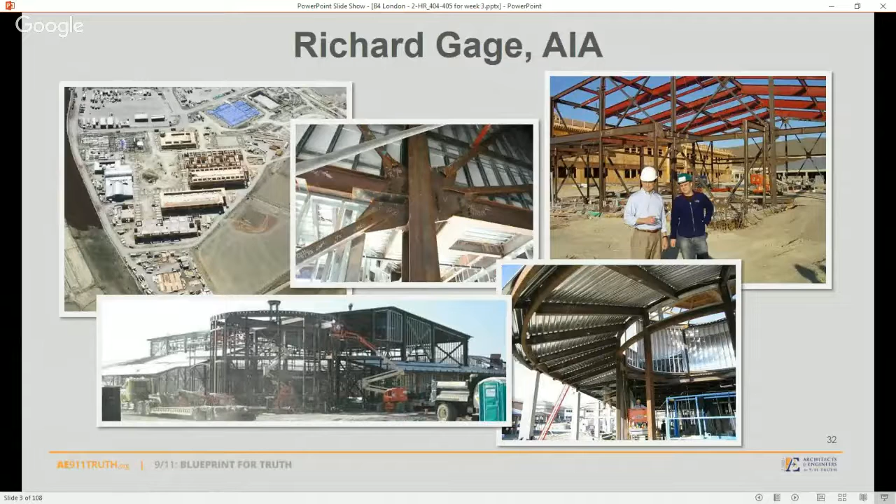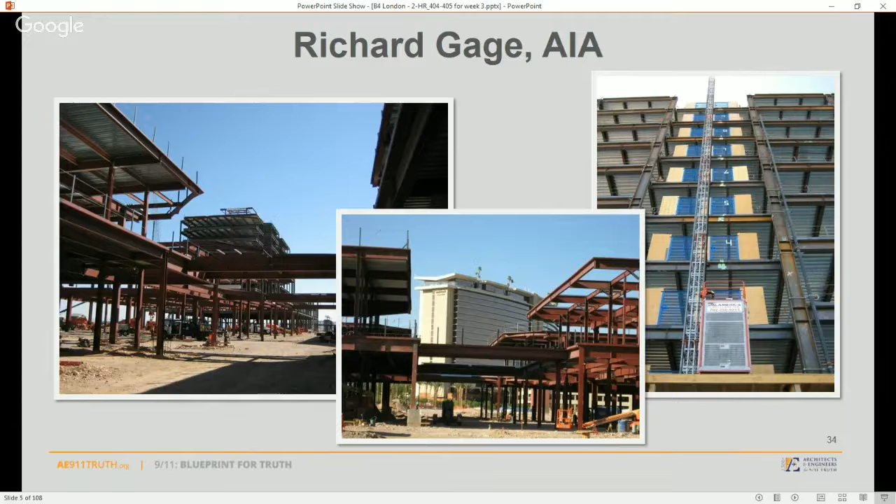So a little bit about me. I've been an architect for 28 years. I've worked on many different types of buildings, including these $3 and $10 million gymnasiums in the San Francisco Bay Area, with the construction documents and the construction administration for this $125 million high school in the Bay Area. And also more recently, the construction documents and administration for this $400 million project near Las Vegas, Nevada. This is a project with mid-rise office space, commercial space, altogether more than 1,200 tons of fireproofed steel framing.

I'm joined in this effort by 2,700 architects and engineers who have put their reputations on the line, having looked at the evidence, which you're going to be seeing today, having come to the conclusion that we've not been told the whole story, and what we have been told is not the truth. And that's why we have thousands of highly qualified technical and building professionals demanding a new investigation. And I'm honored to be counted among them. We founded this organization 10 years ago.

We've been educating architects and engineers all over the country, the public, the media, and elected officials as well in Washington, D.C., where we've given our DVD and our petition to the offices of 535 congressional elected officials. We've met with their staffers. Several dozen of them have had the opportunity to have a glimpse of the evidence you're going to be seeing today in a 15-minute presentation, which we have called Solving the Mystery of World Trade Center 7, narrated by Ed Asner. We've also been throughout the United States in the last year showing our film, Firefighters, Architects, Engineers Expose 9/11 Myths.

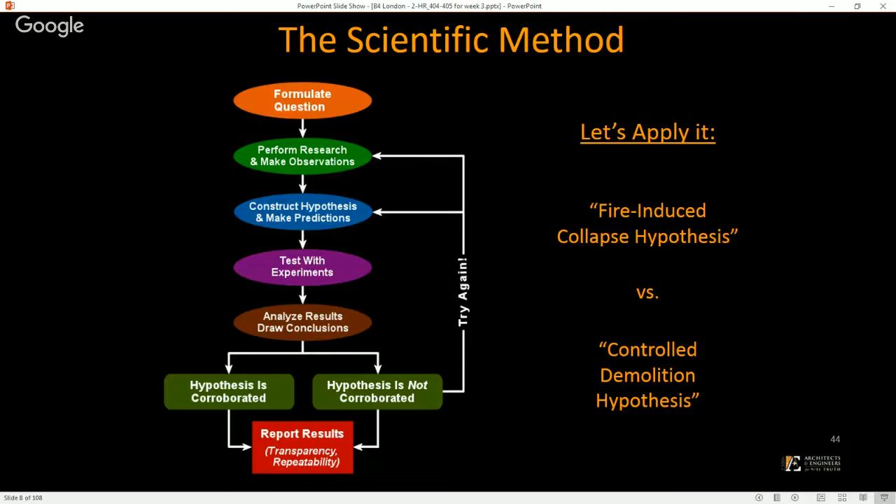And we're going after the truth, and they expect to find it, and we're expecting that to be a major player in the awakening of professionals across the country. But we're going to use the scientific method right now. We're not going to wait till that comes out next year. We're going to gather data. What are the forces that destroyed buildings? Well, we reviewed explosions. We reviewed earthquakes last week. We're going to look at fires a little more today.

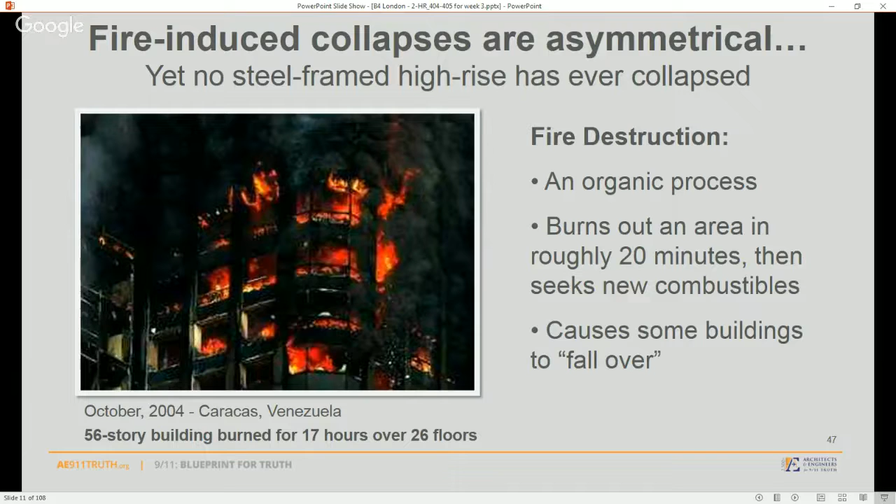Fires never brought down a high rise, ever, except on 9/11 when we've had 3. Fires are an organic process. They burn through a building every 20 minutes or so in a given area, move on looking for fresh new fuel sources. So if a building, say a wood frame building, which certainly have come down, was to collapse due to fire, we'd expect a gradual collapse. It would fall over, not straight down through the path of intact, cold, hard structure below. But let's take a deeper look at steel frame buildings in fires.

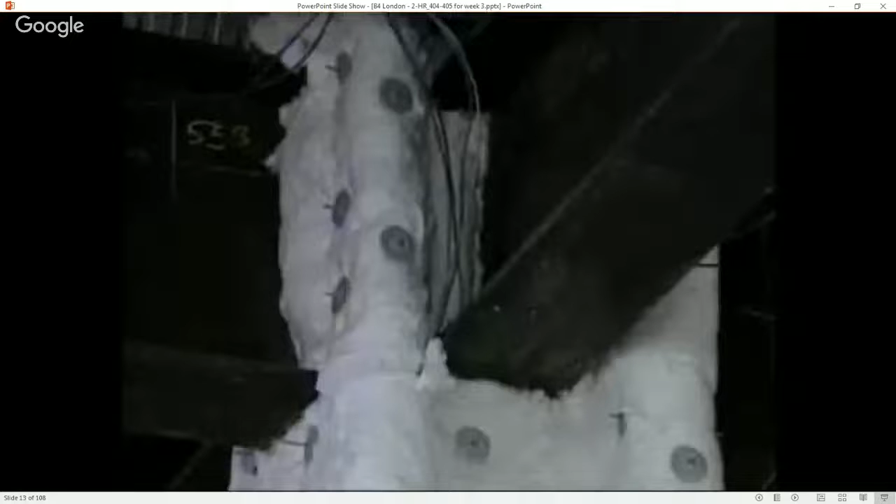The way in which steel-framed buildings behave in fires depends on their construction. In this test, done by British Steel in 1995, a large amount of typical office furniture was burned to see what would happen to the heavy steel beams that supported the ceiling. When steel is bare, when it heats up, it gets weaker. It's not that it melts in a fire. In fact, normal fires are not hot enough to melt steel. Even if you were, for example, to use an unusual fuel like kerosene, you cannot achieve temperatures hot enough to melt steel. But what happens is it starts to lose its strength.

And as it loses its strength, it starts to sag. It becomes softer and sags and can no longer support the load. This was the largest test of its kind ever conducted. It showed how unprotected steel can be distorted even by a normal office fire. But as is typical in steel buildings, the structural beams only slowly and progressively warped and sagged. There was no chance of a sudden collapse. In over 20 years, I have not seen, until recently, a protected steel structure that has collapsed in a fire. Until recently, of course, we're referring here to 9/11, where we did have 3 collapse.

Now, what did you just see? You just saw a historic fire test in the United Kingdom in 1995 in Cardington, where they burned an 8-story building with 2,000-degree fires, which are completely unheard of. Even on 9/11, we didn't have fires anywhere close to those temperatures. And yet this building and these beams and columns, unprotected, no fireproofing on many of them. Some of them had fireproofing. They were testing both conditions. It did not fail. They merely softened a little bit and sagged, because steel can lose half of its strength at 1,200 degrees Fahrenheit.

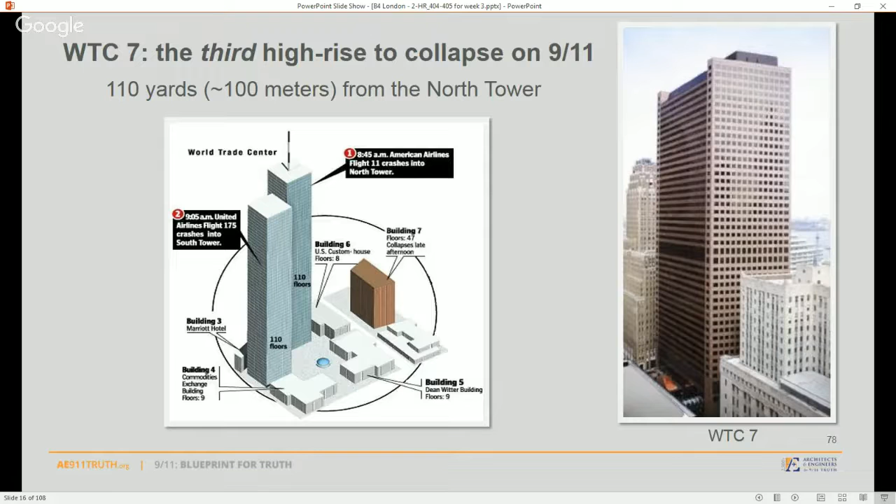So the Twin Towers went down earlier that day in the morning. 7 hours later, Building 7 collapses. Here it is, surviving nicely after the Twin Towers went down, or during that time. And there was some minor damage to the building. NIST claims that this is not a significant factor in this building's collapse.

In fact, they focus on a structural failure on the opposite side of the building. They rule out damage from the Twin Towers. They rule out diesel fuel, which was in this building, but they say there's no evidence that it was burning. They rule out the ground shaking from vibrations from the collapse of the Twin Towers. We'll look in detail this week about what their theory is and how much sense it makes.

But first, we're going to note that there are typical features of controlled demolition. And we looked at those last week in detail. And I encourage you to go back and look at the archive and pick up the basics, which we're not going to be able to cover today because we're going into more depth. Right on the website, AE911Truth.org, we have the archives of our previous webinars.

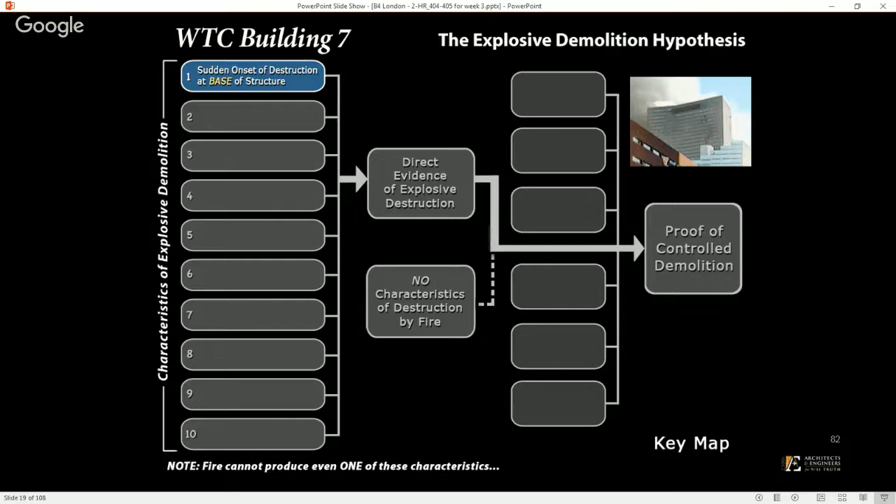So let's start with seeing if there is a sudden onset of destruction at the base of this structure. We look for the first time, for many of you, at a glance at the destruction of this building, narrated in this case by Dan Rather that morning on CBS. And what you're seeing are high shots.

Now, here we're going to show you a videotape of the collapse itself. Describe that. Now we go to videotape the collapse of this building. It's amazing. Amazing, incredible, pick your word. For the third time today, it's reminiscent of those pictures we've all seen too much on television before, when a building was deliberately destroyed by well-placed dynamite to knock it down.

Well, that's an interesting comment. Of course, we've never heard that comment from Dan Rather again after that morning, which was his intuition about what he was looking at. Indeed, it looks exactly like the old hotels in Las Vegas. And that's the first intuition of all the architects that come by our booth, who see it for the first time, or maybe not for the first time. They all, 90% of them, say that's a controlled demolition, or that looks like a controlled demolition.

Well, we haven't seen this building destruction played on national television, with the exception of maybe 4 times in the last 10 years. Why? This is easily one of the worst structural failures in modern history. After the Twin Towers, it is the worst. Should have been the most studied building failure in history, because many high-rises are built just like this, hundreds, with long span steel beams, which we'll come back to.

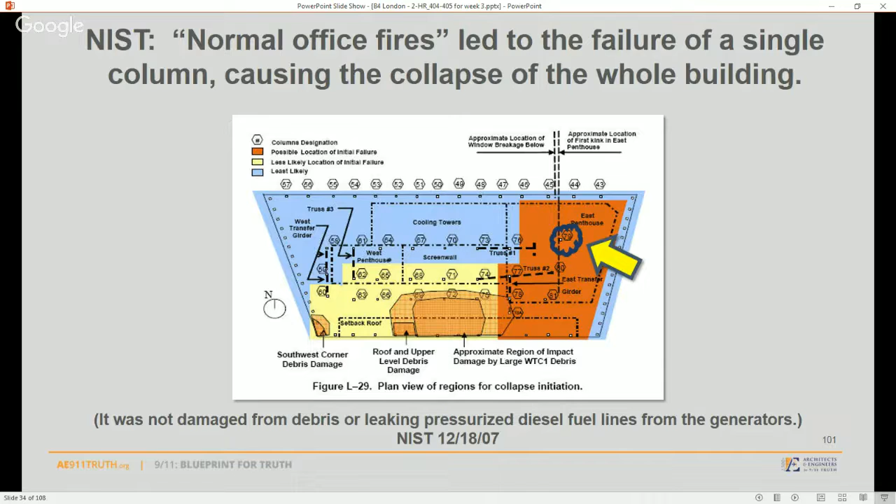But what's the problem? These fires are burned out over an hour before on the 12th floor, where NIST focuses its initiation of collapse with raging fires. The photos prove that the fires were out up there. They had moved across and were heading in this direction to the west.

So here's NIST's fire. It starts over here on the right side, gets larger, moves across to column 79 at, they're saying, 4 p.m. But again, those fires are out. We just saw that. They burned out over an hour before. And yet they claim that they're sitting there for over an hour burning around column 79. Well, there's not enough fuel to burn that long.

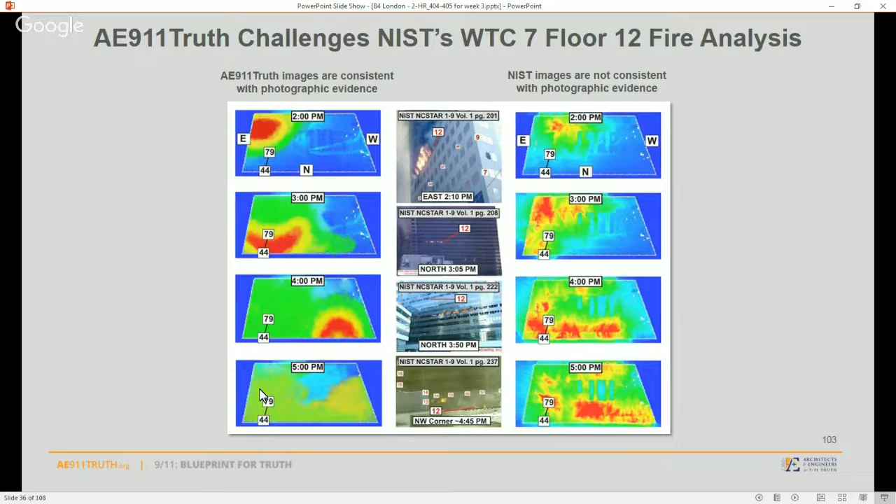What the photos show is that these fires moved from 79 at 2 or 3 over to the west side, leaving column 79, according to the photos, not anywhere near the heat. Why is this important? Because there's a theory that NIST puts forth. And that theory tells us that those fires expanded these long span beams, thermal expansion, which pushes this girder off of its seat on this column 79,

allowing floor 13 to fall on 12, causing a pancake collapse for 10 floors, leaving this column 79 unbraced, where it finally buckles, which is a bending process in columns, allowing the complete collapse then all the way up to the east penthouse, causing the east penthouse to fall. I'm going to point out a series of failures, impossibilities in this theory. First of all,

this composite floor structure is composed of concrete and steel. And it's all fireproofed. So these steel beams could not have expanded because they're fireproofed. What we're looking at here is a partial fireproofing during construction, but it all ends up being fireproofed. 2 and 3 hour protection for the columns and beams. In other words, a fire could last that long and not expand these. So this is ignored by NIST.

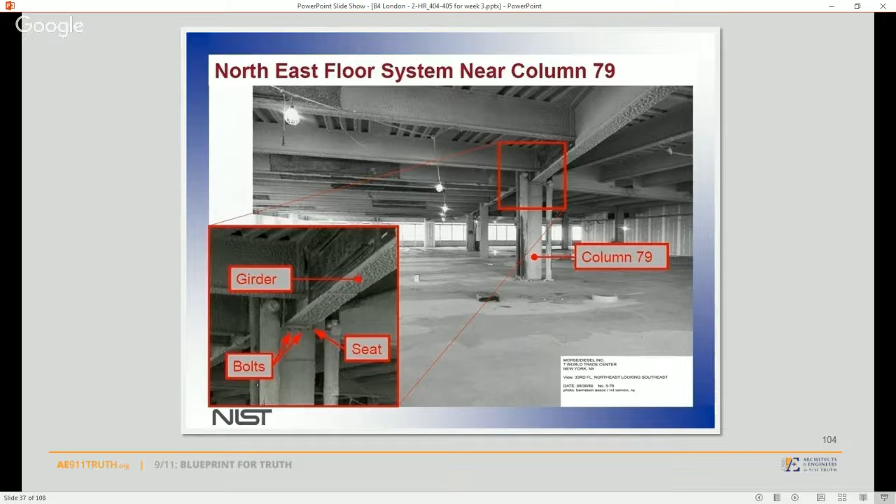But even if there was a complete pancaking collapse inside this building of 9 floors, as NIST theorized, you would have seen a massive deformation on the outside perimeter structure, because all these beams and girders frame quite securely to the perimeter structure. And you would have seen massive breaking of windows and granite panels and crumpling of this building. That didn't happen. You saw the building go down itself.

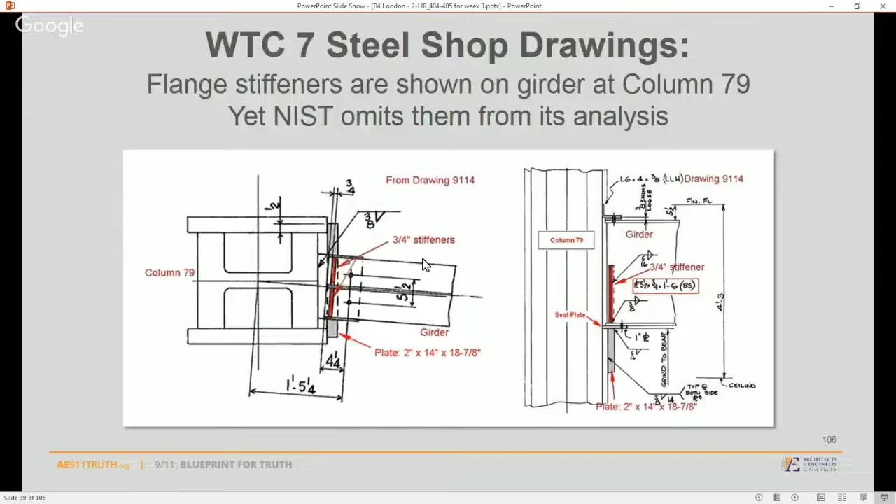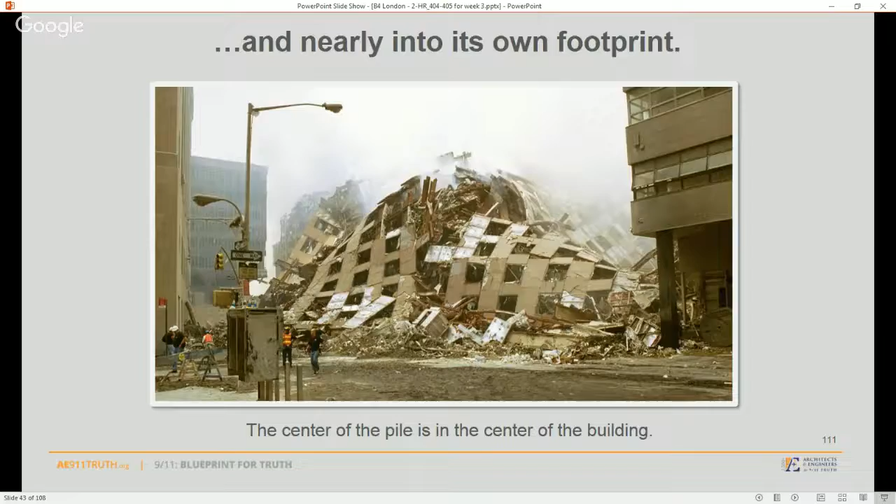How do we bring a building down like that? Well, in this building, we have 80 columns or so. All of them have to be removed at once. And as we saw evidenced by the collapse of this penthouse a half a second prior, all 24 core columns would have to be removed at once, allowing that penthouse to come down early, and then followed by the perimeter columns, all within a fraction of a second. And then that repeated on at least 8 floors. And I'll show you why I say that.

Does fire have that level of precision? Fire, an organic process that moves through a building every 20 minutes or so, burning up in one area, moving on, looking for fresh new fuel sources. No, not going to happen.

How fast is this building coming down? Well, NIST admits that it came down at free fall. Now, this was after they denied publicly for years that it came down at free fall. They say, hey, well, if it came down at free fall, that would mean there'd be no structure underneath it. Well, then members of AE911Truth, particularly David Chandler, a physics teacher, whom we'll hear from, shamed them publicly in a press conference into acknowledging that it did, in fact, come down at free fall.

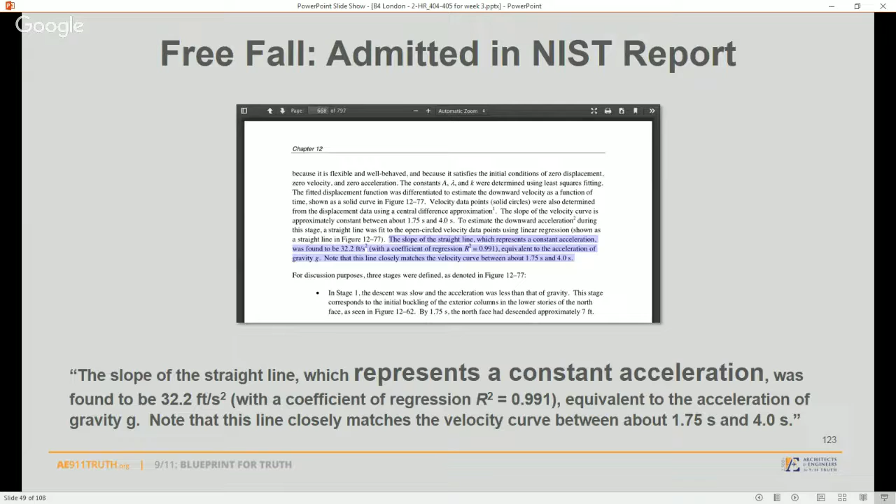You have to remove that structure all at once. And that's the evidence we see in key point number 5 here, the total dismemberment of the steel structure, where it's broken up and ready for loading and shipment. It falls like a house of cards, one structural beam removed from its column on each side, all throughout the building. Buildings that fall naturally don't break up like that. They're damaged, certainly. They do not dismember. Their concrete is not pulverized to a fine powder, which we'll be looking at in the case of Building 7.

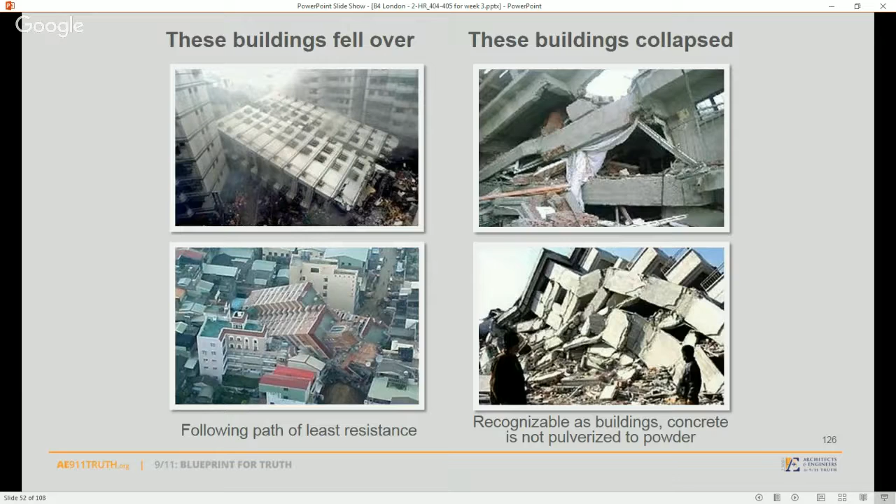Well, FEMA did an evaluation in 2002. And its author, Jonathan Barnett, fire protection engineer, says publicly, steel members in the debris pile appear to have been partly evaporated in extraordinarily high temperatures. But there's no explanation of where these extraordinarily high temperatures could possibly have come from. These are 500-degree fires, maybe 600, maybe 700 degrees. These are not 2,000-degree fires created in that test you saw with ceiling-high piles of wood designed to create the hottest fires imaginable by hydrocarbons.

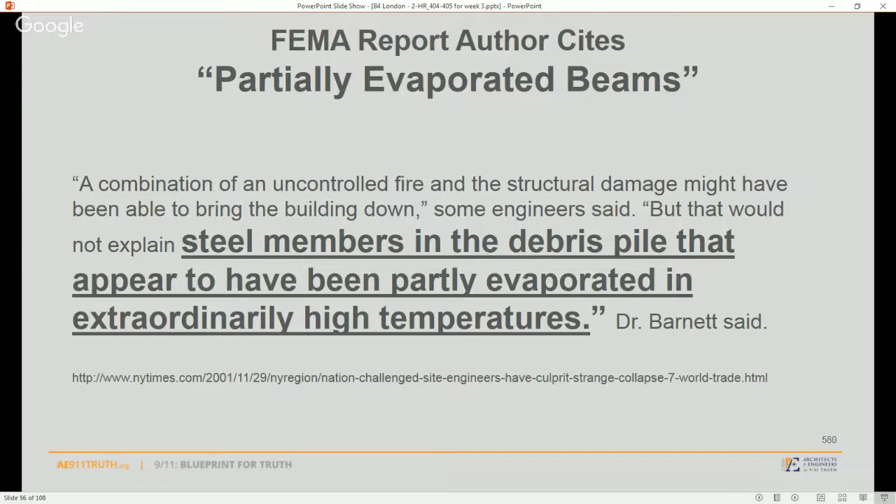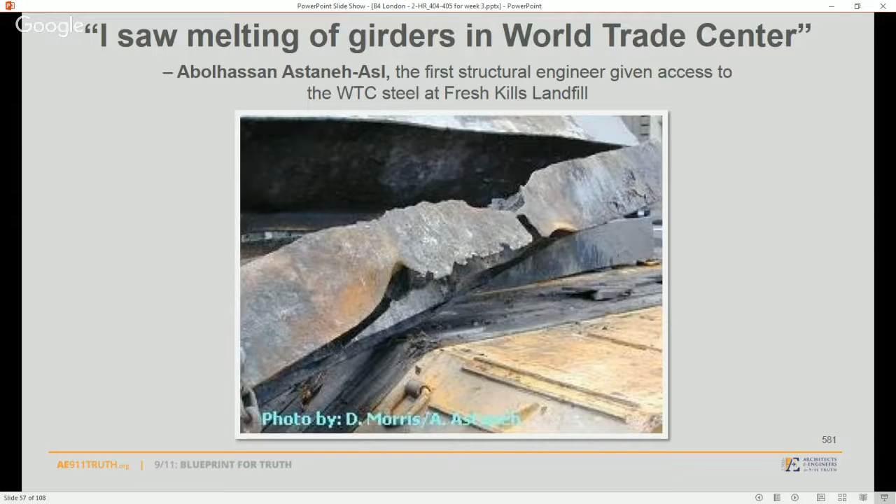No, it takes 4,000 degrees Fahrenheit to evaporate steel. And it melts at about 2,800 degrees. There's no temperatures or explanations of such in this fire. In fact, Abolhassan Astaneh-Asl, the structural engineer given unlimited access to the Fresh Kills landfill, examining, documenting the hot temperature corrosion of this steel from Building 7, was completely puzzled by how this could have happened. He doesn't posit an explanation, but FEMA does.

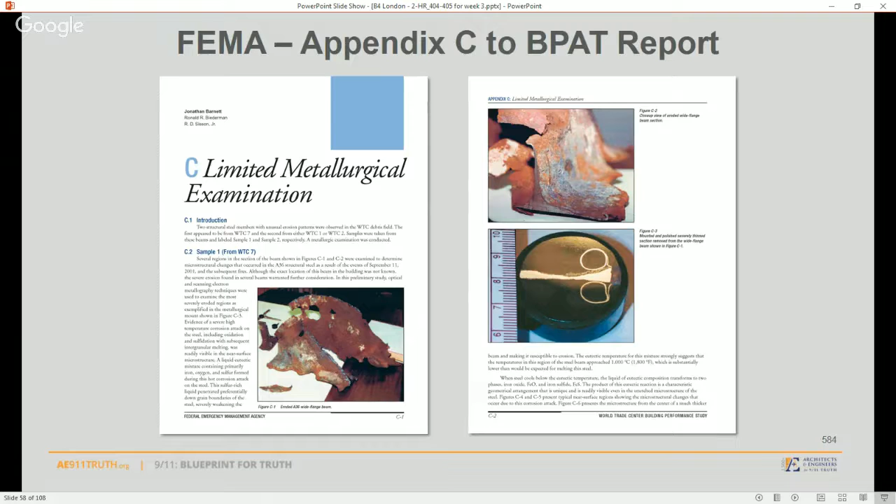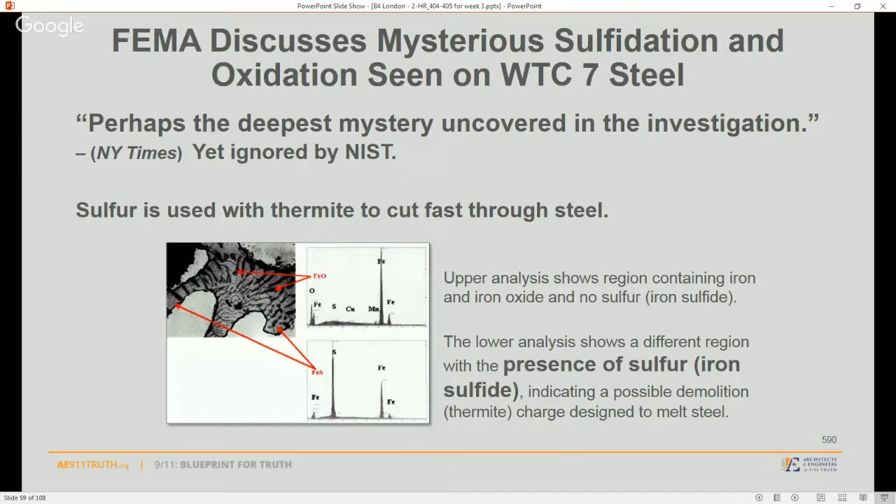In fact, they did a complete detailed metallurgical examination of this steel from Building 7 in their 2002 report. And what do they find? Well, they find what the New York Times calls the deepest mystery uncovered in the investigation. They find sulfur, the presence of sulfur, iron sulfide, molten iron mixed with sulfur. Where did that come from? Never before observed in building fires. It's called a eutectic reaction.

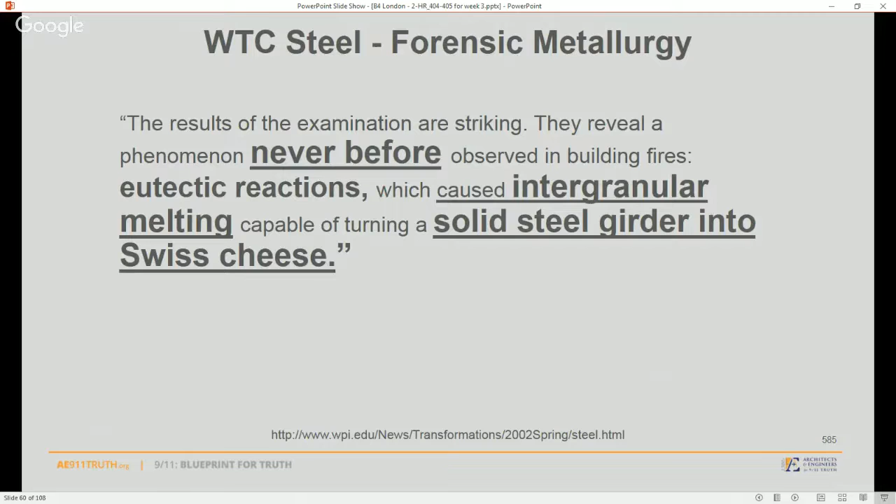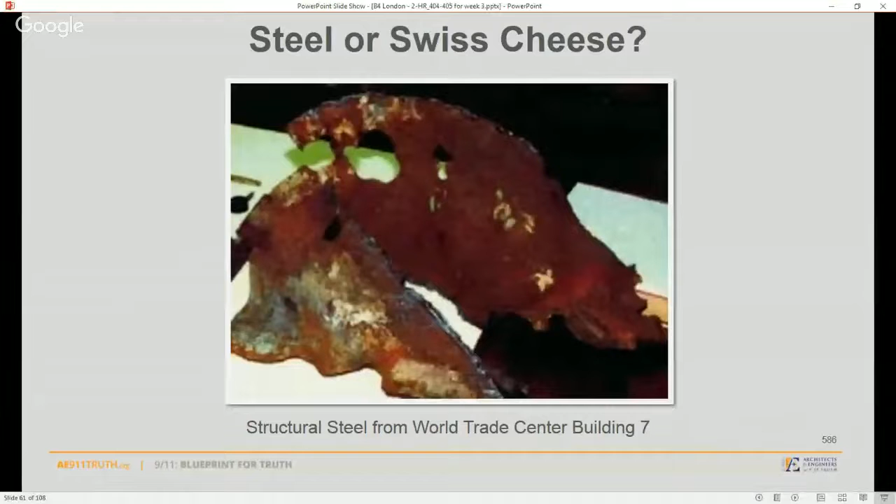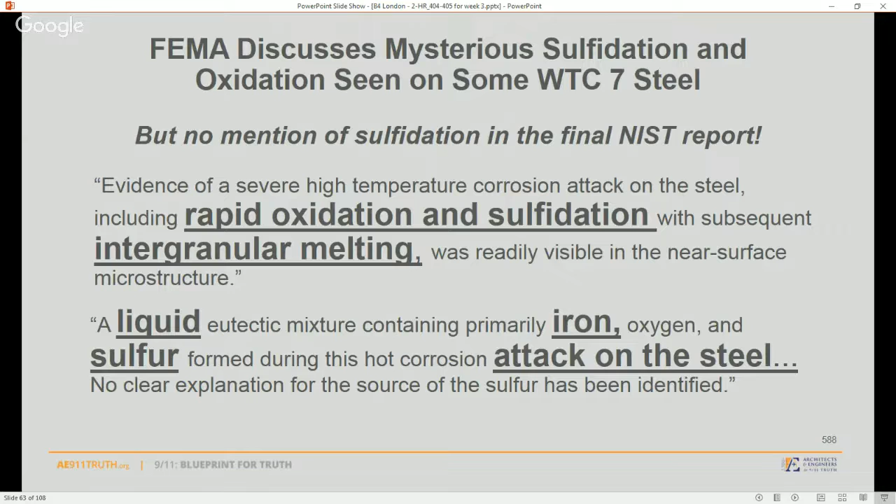Melting, capable of turning a solid steel girder into Swiss cheese, like this piece of World Trade Center 7 steel. The focus of their investigation, this doesn't happen in normal office fires, the official cause of this building's collapse. Rapid oxidation, sulfidation, intergranular melting. The steel is melting from the inside out. Liquid iron and hot sulfur attack on the steel. Where does liquid iron come from? This is not even melted steel. This is elemental iron that's documented here by this team of technical experts in the official report from FEMA, unexplained by NIST.

And there's lots more evidence. In fact, we looked last week at the pools of molten iron found, molten iron pouring out of the south tower, which we'll get to next week. Molten iron droplets found in the dust, billions of them, 10 tons altogether or so. We'll get to that in week 4.

But so far we have chemical evidence by official sources, FEMA, in their 2002 report, which NIST threw out when they took over this investigation, not including any of this detailed metallurgical examination of the steel from World Trade Center 7 in their final report when it came out in 2008. It's completely removed. Well, to the 2,700 architects and engineers that I represent and most other people who see this evidence, this is direct evidence of explosive destruction. Fire can't create any one of these, let alone all of them.

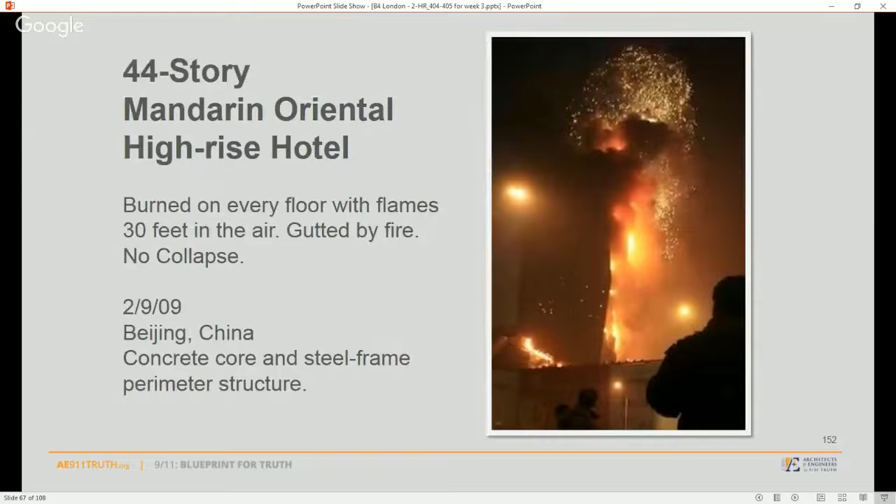We have quite a history of such fires, much larger, longer lasting in these buildings, like this one in China in 2009, burning top to bottom. And in the last couple of years, there's been a number of fires in the Middle East in skyscrapers that have not brought any of those down, even though they're like this one, burning top to bottom in a complete conflagration.

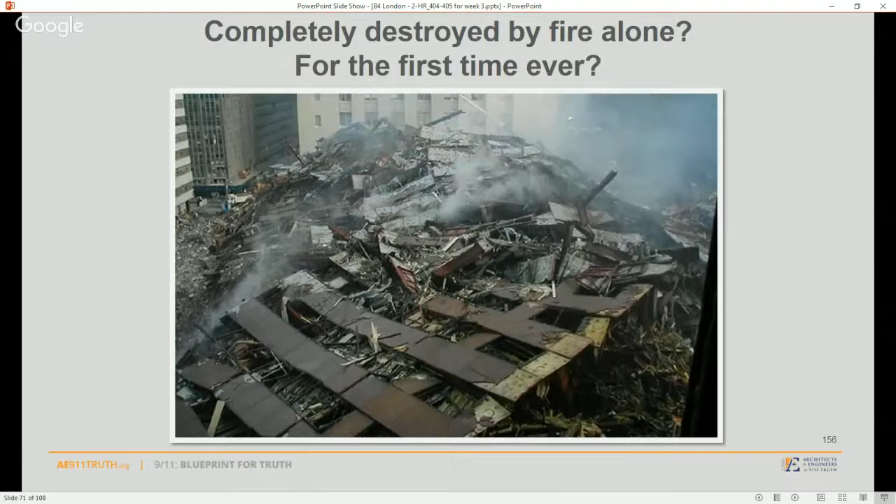Now, the data from the NIST reports, let's take a look at it. There were investigations by our government into this collapse, starting with volunteers in 2001. Well, these volunteers worked themselves into the FEMA report, finally got some funding, $600,000. And you saw the metallurgical examination that came out of that report, which was removed by NIST when they came out with their final report 7 years later, claiming normal office fires brought this building down.

But look at this cast of characters, the main ones working all the way through from the FEMA report, from the volunteers. Gene Corley was an original volunteer, through all of the other reports, helping Popular Mechanics as well create their targeted effort to discredit those trying to bring truth and awareness to the American people, professionals, the media, the government about this. But they don't look at any of the evidence that we've been looking at this week and last week. They simply say, oh, they're conspiracy theorists. There's no architects and engineers.

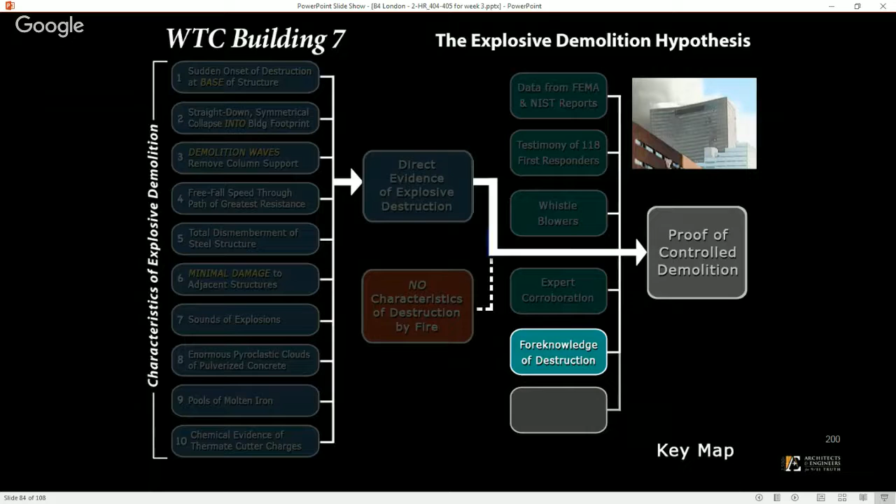Is there foreknowledge of the destruction of this building? We looked at some last week. Let's look at some more. The department fire chief, Nick Visconti, says, hey, we're removing the command post in Building 7 over this way. That building's coming down. Now, the fire chiefs told the firefighters not to go in and fight these fires. They were told it was going to come down. They were told it had structural damage. That was the story put out.

So they're all, you know, no building has ever come down due to fire. No high-rise structure. Okay. Well, in fairness, you know, they did lose that morning hundreds of firefighters in a building that had structural damage. So, okay, we're not going to argue this point. We might make the same decision to be cautious.

But interestingly enough, in this interview with Indira Singh, she says, yeah, they told us Building 7 was going to come down or was being brought down. There were all these rumors about them bringing down Building 7. Some of those rumors were associated with the structural damage. Do they actually use the words? The interviewer, Bonnie Faulkner, says, and who was it was telling this? They said, well, there was the fire chief, and he said they were going to bring it down.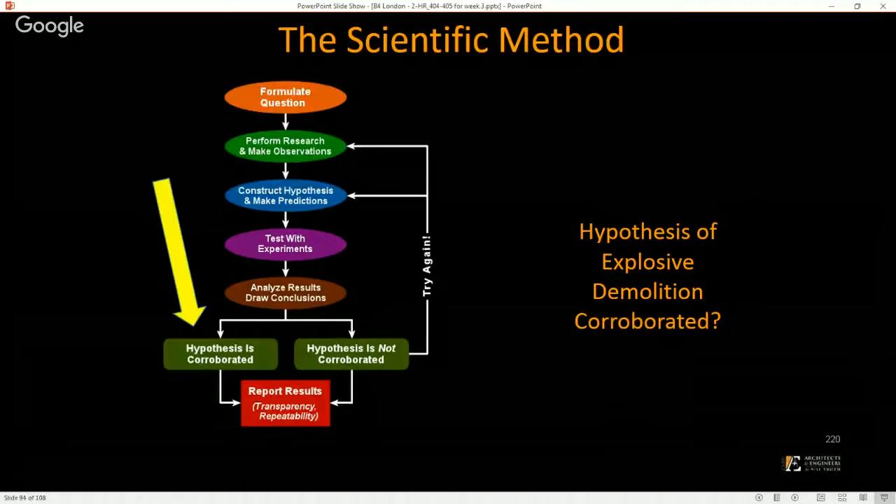Well, there's plenty of other witnesses that we heard last week about explosions prior to the collapse of this building. So I encourage you to look at that information. At this point, though, is the hypothesis of controlled demolition corroborated for you with the evidence that we've seen this week? Do we have at least eight today of the key characteristics, and last week, characteristic features of direct evidence of explosive destruction? Can fire create any one of these? Can fire create all of them?

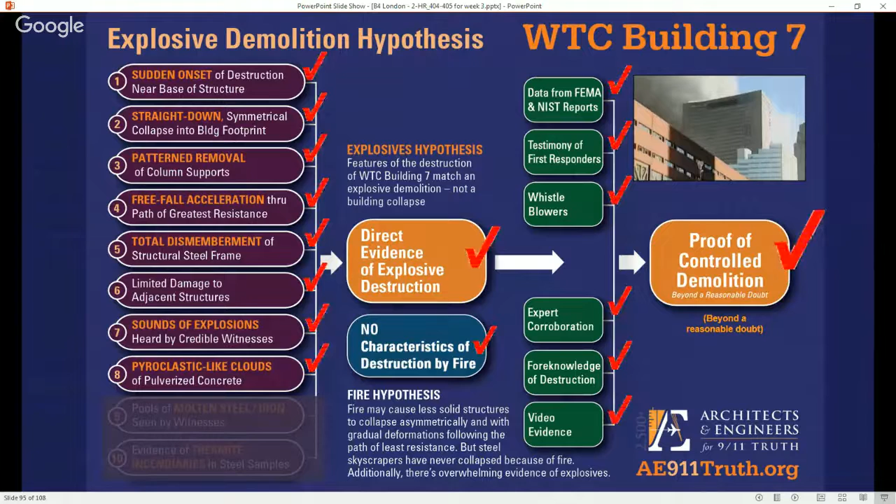Well, with additional corroborative testimony and data, video evidence, is this to you proof of controlled demolition? Is it proof beyond a reasonable doubt? That's the question. Do we need a new investigation?

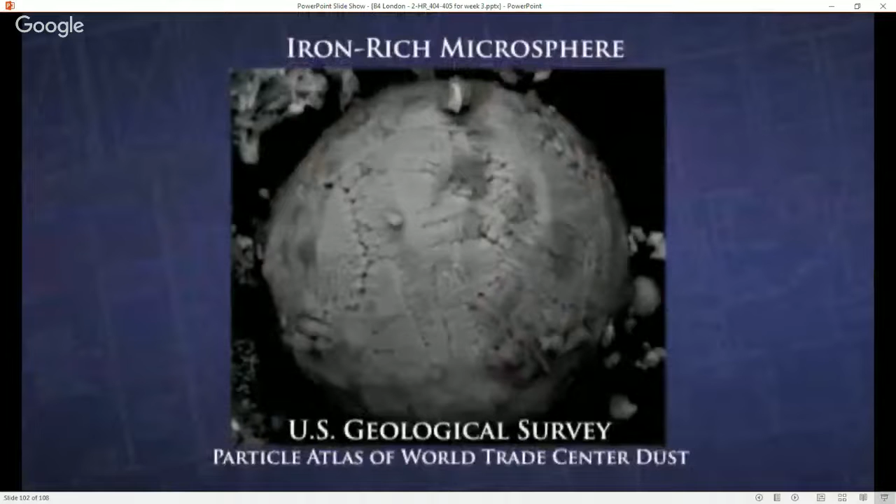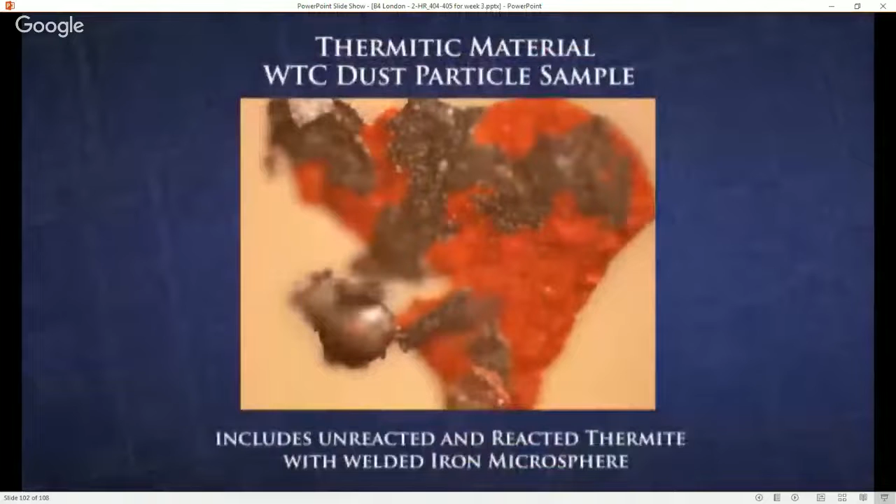Zeker weten. What I saw, it was a classic implosion. The center of the core, the penthouse area, starts to move first, and then the building follows along with it. NIST excluded the documents from FEMA in Appendix C that documented the evidence of melting steel. In an office fire, you cannot generate enough heat to melt steel. There were these iron microspheres present in all of the dust samples. They needed to have been formed in extremely high temperatures. All the characteristics of the microspheres, along with what I see in the attack of the beams that were actually found, tell me that thermite was involved. In the dust, what we had found was a modern version of thermite, which we call nanothermite. NIST concedes that they found no evidence for explosives. So then we asked them, well, did you look? And they said, no, we did not look for explosives or residues of explosives.

And in fact, the evidence is overwhelming that these red-gray chips are very high-temperature incendiaries. And we have watched as scientific integrity has been undermined, and scientific research politicized in an effort to advance predetermined ideological agendas. If this is a crime, I think everybody agrees it's a crime. Evidence was removed from the scene of the crime. You can't do science when you are deprived of the evidence and when your hypothesis is the least valid instead of the most likely. And the most likely hypothesis in the case of Building 7 wasn't even mentioned. This is not science.

Imagine showing this powerful film with another hour in our free version, or another 90 minutes of solid, packed evidence, including 8 psychologists who help us understand why this information is just so difficult for so many people to digest, how it turns our worldview on its edge, upside down, like my own experience 10 years ago, hearing David Ray Griffin on the radio, not having been aware of the third tower at all before that, or that there was any alternative theory about how these buildings might have come down.

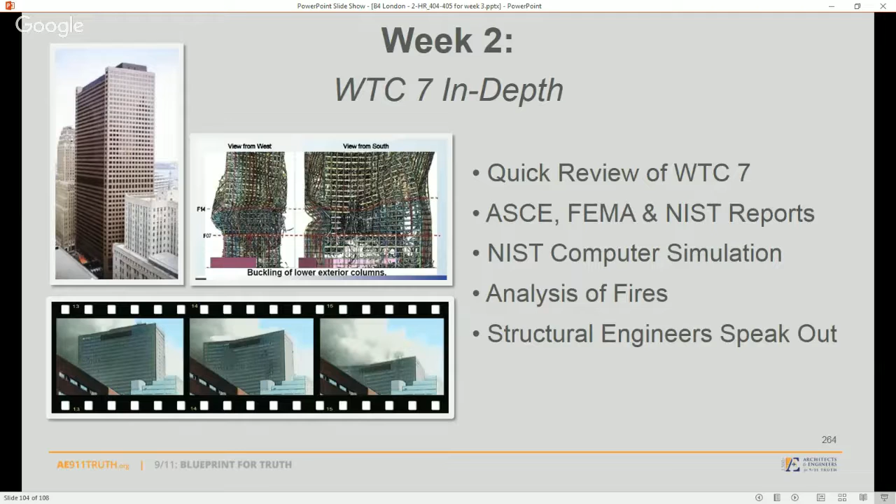This week, we looked at WTC 7 in depth. Next week, we're going to be looking at the Twin Towers with an overview first, evidence of explosions. Why is there a sudden near freefall collapse once again? Why are there high velocity lateral ejections out of both towers, which can't be explained by a gravitational collapse? Why is there the complete shattering of the structural steel frame from top to bottom and midair pulverization of concrete? That's week 3.